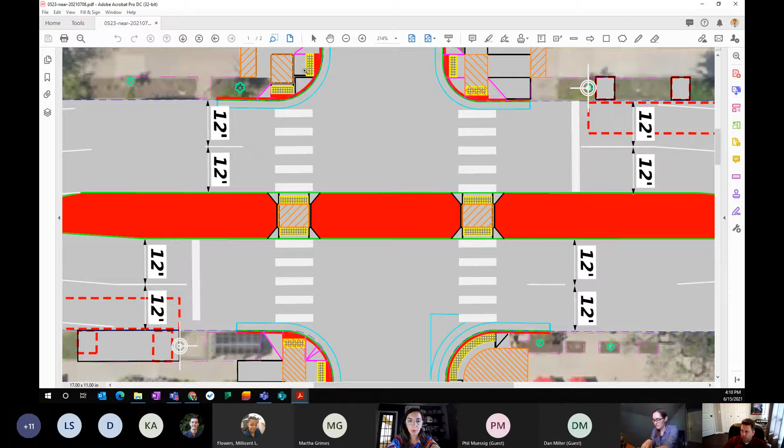I'll add that it's not shown in this graphic, but for most of this median it's a vertical face curb, but in the middle we're putting it to be more of a slope. This will allow for fire trucks, if need be, to cross over the median. It's not going to be too obvious—we don't want it to be obvious, so most cars will take that left, but when a fire truck needs to go across, they'll have that possibility. It's not shown in the graphic, but it's a detail in our construction plans.

Is there a rapid flashing beacon at both of these intersections? Yes. There'll be push buttons on each quadrant for people to activate the RRFB with the flashers. And in the median we'll also have flashers, so it's flashing in the median too. So drivers in that inside lane will see a flasher, and there's a total of 6 different flashers at each of these intersections.

Well, super. I don't see any more questions or anybody with raised hands. I really appreciate you bringing this back before us, Jason and Kelly. I think it was a great conversation in March, but I'm appreciative that we can see this happening, and that's good news about the 4 to 3 pilot program. Yeah, when that's getting more kicked off, I'm not the project manager on that one, but they will definitely be coming back to you guys with more engagement on the 4 to 3. That's all I got, thank you very much for having me.

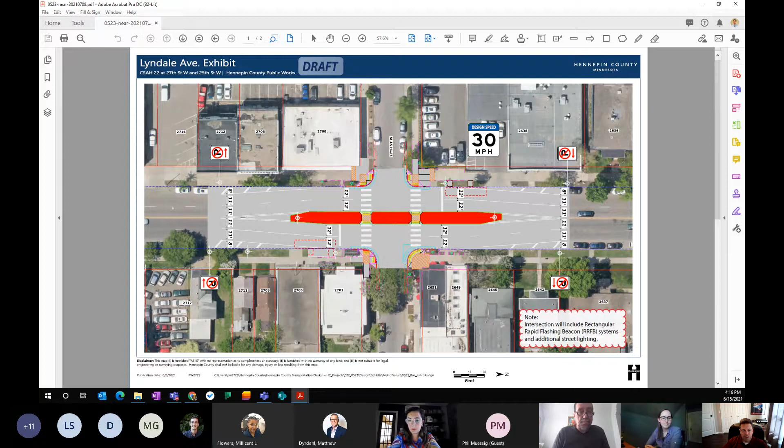Okay. Well, thank you very much, Jason and Kelly. No problem, thank you. Do you need anything from us, by the way? I don't think so. Kelsey, do you need anything?

No, I'd leave it up to the committee. We did get a resolution from you all when we were here last with the previous concept, and I don't think we need one to move forward. If there's something you all would like to memorialize, great, or something about the 4 to 3 support for that coming maybe would be good. But I don't think for this project that we need any further resolutions.

Okay. Great, thank you very much. Thank you, have a good evening.

All right, next up we have the University and 4th Bikeway, which is at 15 to 30%, with Mike Samuelson from Minneapolis Public Works, Kelly Augusto from Hennepin County, and Steve Weiser from Alliant.

Good afternoon everyone, my name is Mike Samuelson. I'm a transportation planner with Public Works, use he/him pronouns, and similar to the presentation Kelsey did, I'm going to largely turn this over to our partners at the county, Kelly Augusto and Steve Weiser from Alliant Engineering. This is a county-led project, and the city's been a partner along with MnDOT and Metro Transit. I'm sure Steve will provide some more detail as well. I think we last came to the BAC in August, so there's been quite a bit of discussion since then, and we're providing an update today to the committee. So Kelly, Steve, I'll pass it over to you.

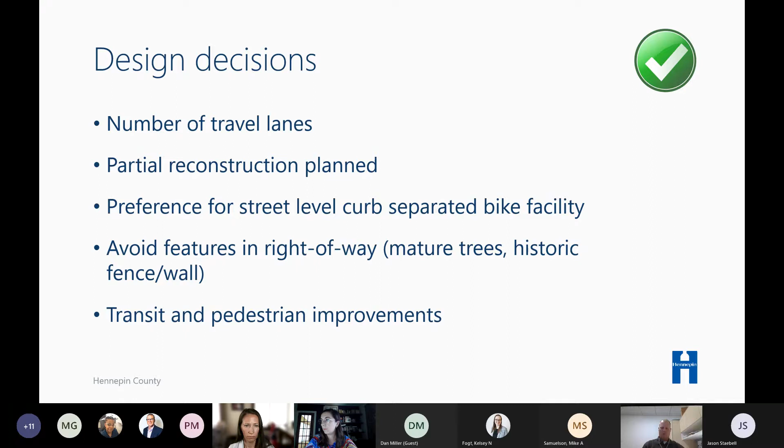Through our first round of engagement and extensive coordination with the project management team, we've landed on a preference for a street level curb-protected bikeway design, which I believe was the preference of this committee as well. There are other constraints and amenities within the right-of-way to consider, including mature large oak trees and historic elements along the University of Minnesota campus.

So working with the project partners, we developed 2 layouts that you have copies of. The first layout, labeled Layout A, has a 2-way curb separated bike facility on University between 10th Avenue and Oak Street. The intent is to provide a buffered bike lane on 4th Street as well.

However, some stakeholders have stressed that 4th Street may be a slightly lesser priority than University, and that a more minimalistic approach on 4th may be understandable to work within the budget provided by the county, while providing a better bikeway on University Avenue. So Layout A has more effort spent on University than on 4th Street.

But we're trying to maintain existing curb lines and sidewalks wherever possible, and where infrastructure is in good condition, we'll try to maintain it in place. With the partial reconstruction, some boulevard space can still be maintained, but opportunity areas for additional greening, boulevard space, and above-ground stormwater management will be limited with a wider bike facility on University Avenue.

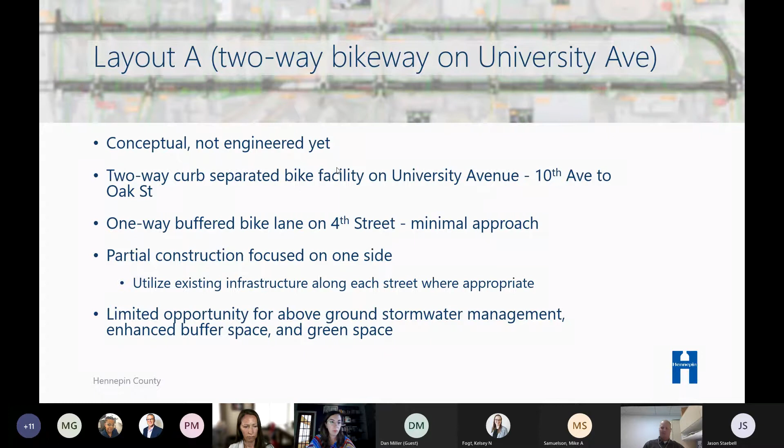This slide shows a representative block for the new 2-way bikeway on University. The segment has 3 travel lanes, slightly narrower than the in-place travel lanes at 10.5 feet, and then 12 feet on the outside where transit vehicles will operate. This design does move the curb line out several feet from where it is today to provide the wider bike facility.

This comes at the expense of boulevard space in some locations and will also require relocating streetlight standards. The design would look similar to the existing facility on Oak Street, south of Washington Avenue on campus, as shown here on the left side of the drawing.

The view at the right shows the dimensions being considered and highlights one of the areas constrained by features within the right-of-way. The green circles represent mature oak trees, some over 3 feet in diameter, right behind the existing sidewalk that we're trying to maintain with either design you'll see tonight.

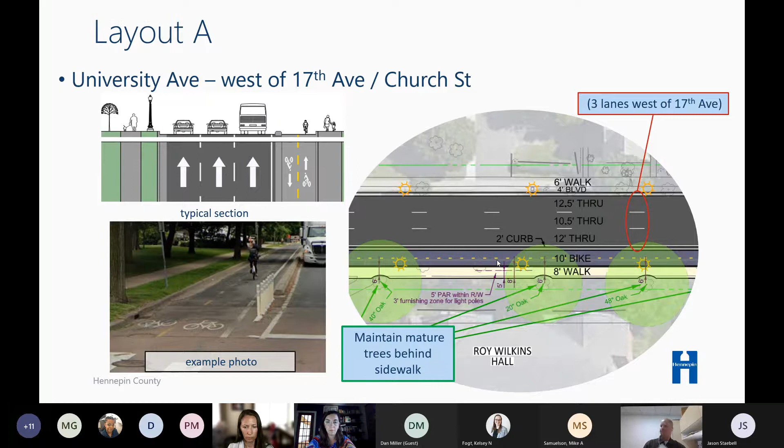The design on the west end includes a 2-way bike facility in areas where the outside curb line is being reconstructed. East of 17th Avenue and Church Street, we have the ability to reduce down to 2 travel lanes and still maintain mobility through the area. This essentially frees up additional space for the bikeway.

I do want to point out that the existing condition out there, which you'll see in the lower left photo, has the existing bike lane in a wide gutter pan area. Basically, it's an integral construction with the curb and gutter, but it's a 6-foot wide bikeable surface that's actually a wide gutter pan for drainage purposes.

But to avoid reconstruction of infrastructure that's in good condition in this area, and to avoid impacts to the historic fencing you'll see on the right side of this drawing, we're proposing to leave some of the curb and biking surface in place. This allows us to leave the sidewalk, the boulevard, and the light poles in place, leaving the green space and boulevard intact while still providing a two-way bikeway in this area.

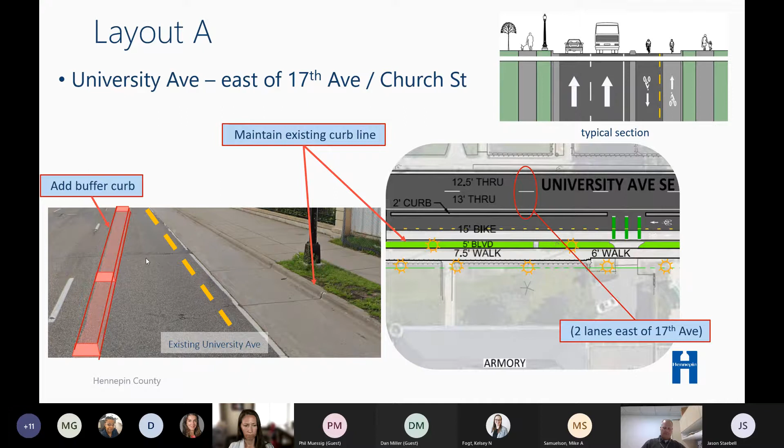With this 2-foot buffer curb that we would add here, we'd still be able to maintain basically a 15-foot wide area from curb to curb face. That would allow us to add a two-way bike facility in that area while still leaving the remaining infrastructure in place. The alternative could be to provide a wider buffer here, with less bikeway space but more of a gap between bikes and travel vehicles in the travel lanes.

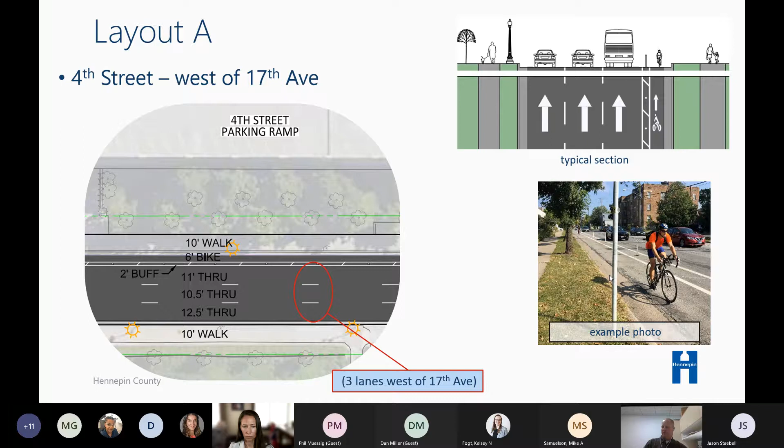There would also be a 4-foot wide biking surface, and then the outer 2 feet would be the existing gutter pan along 4th Street.

East of 17th Avenue, 4th Street would have 2 through lanes. There's been a request from the university to provide space for charter bus parking to be used during events. This space has also been discussed for potential metered general purpose parking at all the other times it's not used for event parking. So that would be the use of this 9.5-foot wide area with a 3-foot buffer and a 6-foot bikeway.

In this area, we'd again propose to leave the curb and gutter in place, the sidewalk in place, and the existing light poles and trees in that area would also remain. We'd provide a 3-foot wide buffer that would likely be striped with delineator posts to facilitate easy unloading for the parked vehicles.

With layout A, the proposed traffic signal phasing along University Avenue with a 2-way bikeway would mimic the phasing implemented on the recently constructed Jackson Street bikeway in St. Paul. A leading bike-ped signal interval would be provided, and right turns would be restricted on red to minimize conflicts with right turners from the University cross streets looking to their left for oncoming traffic and pulling out in front of bicyclists traveling in the contraflow direction.

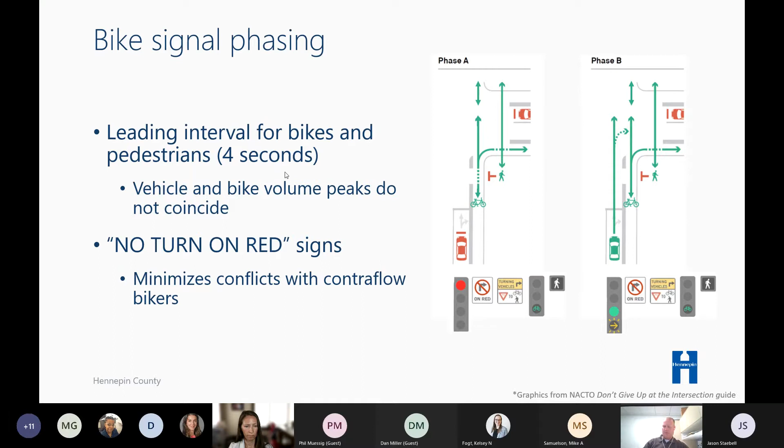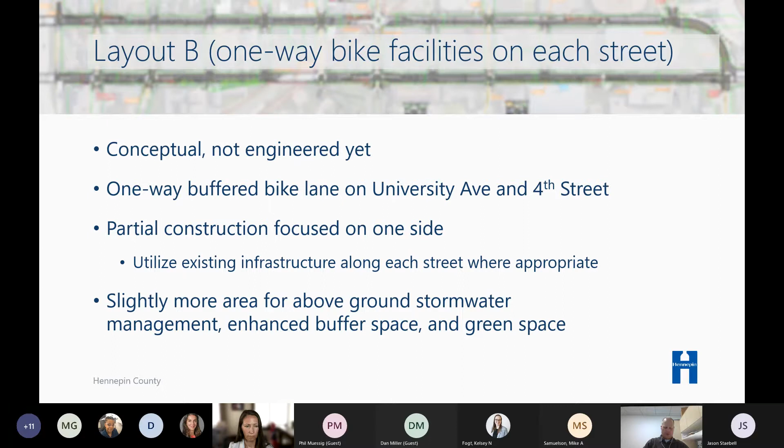The second layout we're working on, labeled option B, has one-way separated bike facilities along both streets. Again, construction would be focused on the bikeway side of the road, with the majority of infrastructure remaining in place. As with layout A, the intent would be to maintain much of the in-place curb and gutter, sidewalk, lighting, and boulevard spaces as much as we can. With this option, there may be additional opportunities for green space and green stormwater infrastructure along University.

This slide shows a representative block for a one-way facility on University on the west end of the project. Again, we have 3 travel lanes, as you'll see on this typical section. We're maintaining the existing 6-foot wide concrete bikeway surface that's out there today, and adding a 2-foot wide raised curb to separate vehicles from bikes. Maintaining the outside curb allows us to save the lighting and sidewalk in this area and maintain existing boulevard trees in addition to the mature trees already mentioned behind the sidewalk area.

In this scenario, striping and delineator posts could be considered in lieu of the curb to make it feel more open for bikers, but that would come at the expense of the better protection afforded by a raised curb, with more potential for handlebar impacts with the delineator posts. So we've shown a raised curb element in this scenario.

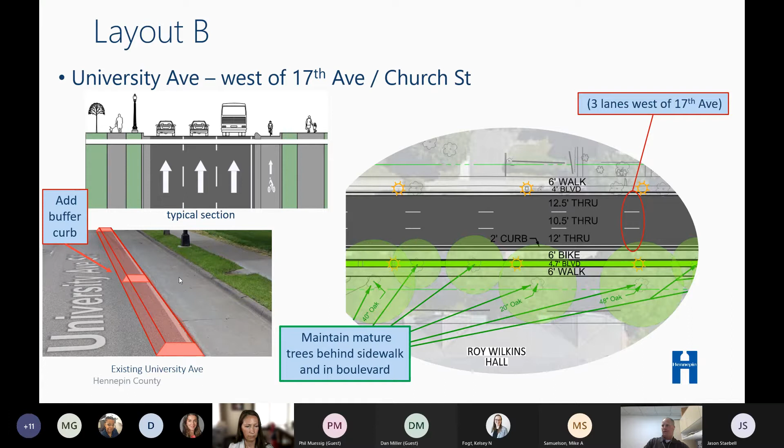The approach east of 17th Avenue, Church Street, is different for layout B. In this area, we're proposing to move the outside curb inwards towards the center line of the street to provide an 8-foot wide one-way bike facility.

The 8-foot width would be an improvement for side-by-side riding and passing, providing a more comfortable ride for bikers than the 6-foot wide alternative used in some of the other areas. Moving the curb allows for a wider boulevard and green space, and potential green stormwater infrastructure if the other criteria for that implementation are met in this area.

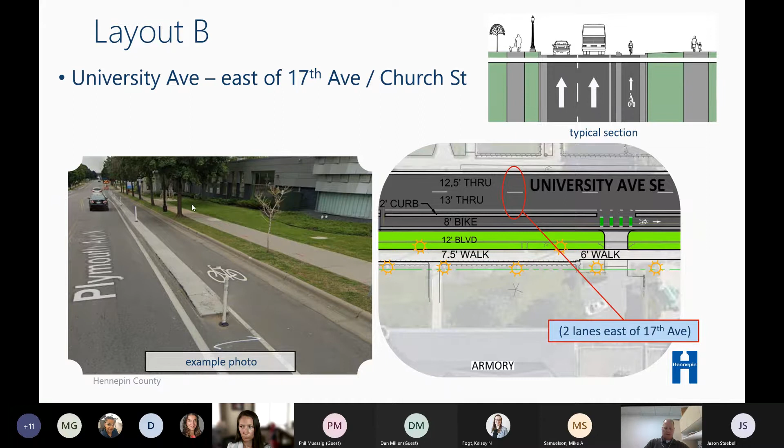Here again, we'd have a 3-foot wide buffer, which would include a 2-foot raised curb element, and the outside sidewalk and light poles could remain in this scenario.

Moving up to 4th Street, this is very similar to layout A in terms of space. Lanes will be narrowed from the existing condition to provide for a 2-foot wide buffer, with the one-way option on University being less expensive to build than layout A.

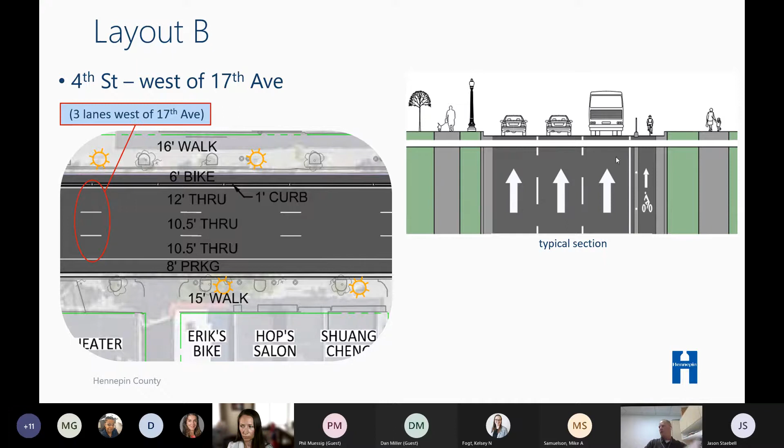There may be some budget available to provide for a curb separated bikeway along 4th Street from end to end. The buffer curb would have to be narrow if we maintain the outside curbs. It'd be 1 foot wide, and the bike lane would still be 6 feet face to face of curb, same as option A, but there'd be a raised curb element as you see on the typical section on the right.

Layout B is identical to layout A east of 17th Avenue. Again, there's 2 through lanes, bus, and potential general purpose parking in that area. Striping and delineator buffers would allow for easy loading into the parking areas, and we've maintained the outside curb and gutter, sidewalk, and the light poles infrastructure, which is in good shape out in this area.

So with both options, there's a lot of detail to work through yet with curb types, curb shape. Some of the options might have different curb shapes to make it easier for pedestrians and riding close to those curb types. So a lot of work to be done there, as well as determining the specific intersection type treatments. Once the feedback's received from the public, we'll work with the project partners to select the preferred alternative and advance the final design elements.

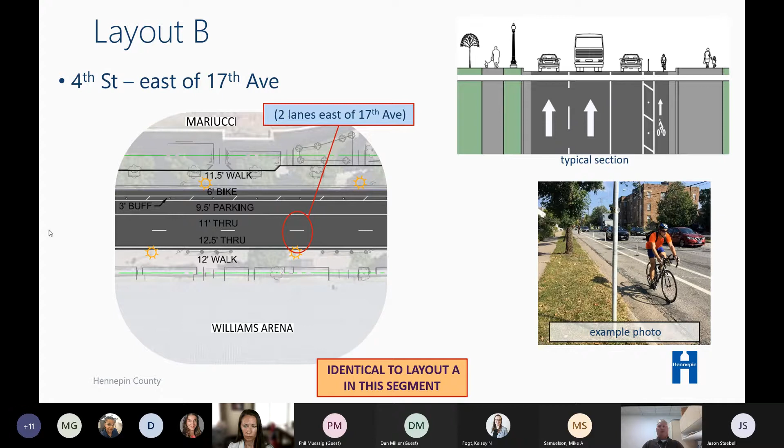And with that, I'll turn it back over to Kelsey to talk about kind of our next steps with the process.

Sure. Our next steps are that we're currently working with the project management team to prepare information for an online public open house that's going to go live starting next Monday, June 21st, and be open through July 2nd.

We're also kicking off our second round of outreach with project stakeholders, including neighborhood associations, business, and university groups. After that, and after the engagement activities, we hope to arrive at a preferred layout with our project partners to go for municipal consent on a layout, possibly in August of this year.

Then the final design and environmental documentation efforts need to be completed and approved by June of 2022, so that we can align with the requirements of our federal funds that are part of our project budget. And then construction would begin in spring of 2023.

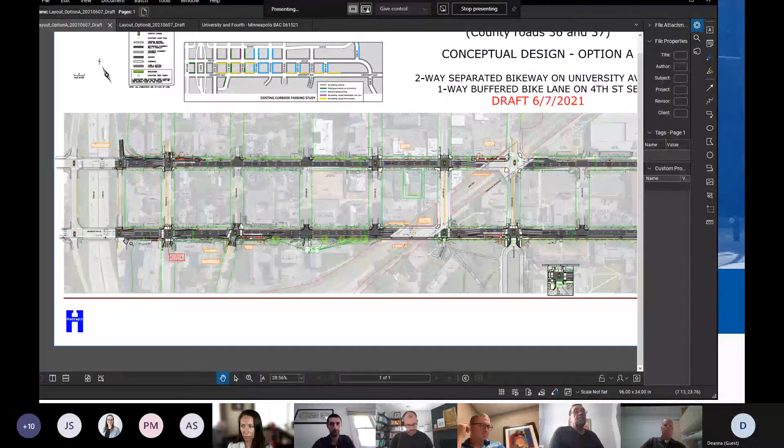Sure, I think I can here. Let me try to grab the screen. Which one would you like to start with? Let's start with A. Okay, I'll pull up A. Can you all see that? Hopefully—there you go, is that in? Is that up? Yep, that's great. Okay, tell me if you want me to go slower or faster, however you want to deal with it.

One thing I want to point out that we recently learned is that MnDOT is potentially considering reconstructing the bridges over 35W in the 2027-2028 timeframe. These would potentially be reconstructed, and the improvements would probably stretch over to 10th Avenue. So we'll be looking at these blocks a little differently, but I wanted to point that out to the group.

Moving on, there's one-way bike facilities coming in from the west that we would pick up. There's the new two-way facility along 10th that will finish construction soon. On the south leg we've shown a two-way bikeway on 10th Ave. With option A, we'd pick up a two-way facility. We've got constraints in the right-of-way by the Knoll apartments—there's an accessible ramp that juts out into the right-of-way, so there's a bit of a pinch point, which is why the layout juts out in this area.

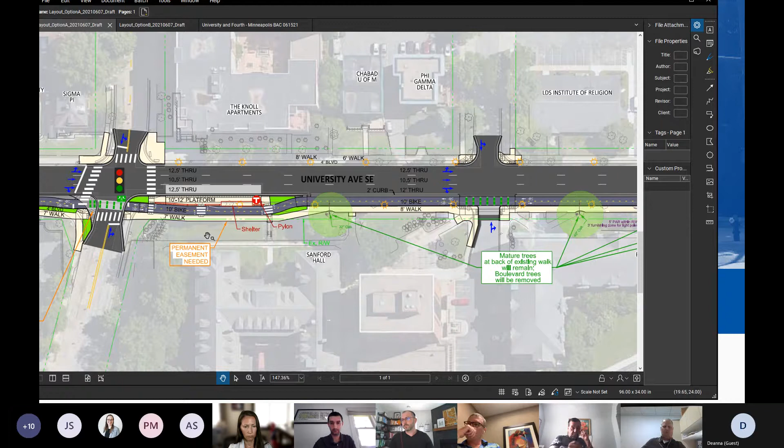Transit platforms along the corridor have been consolidated from what's out there today. The university has worked with Metro Transit to identify 3 locations along each corridor for transit platforms, which will also service the future E-line BRT. For the platform areas, Metro Transit would like 6 feet out front of the shelters for accessibility and loading, and behind here we'll need to look at the grading to match into the adjacent university property.

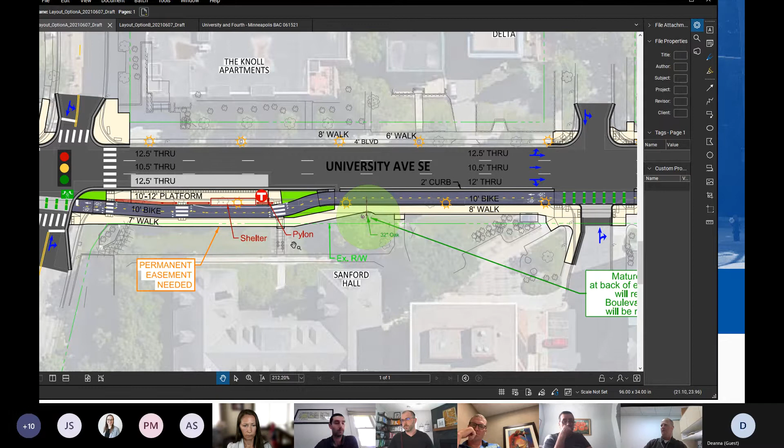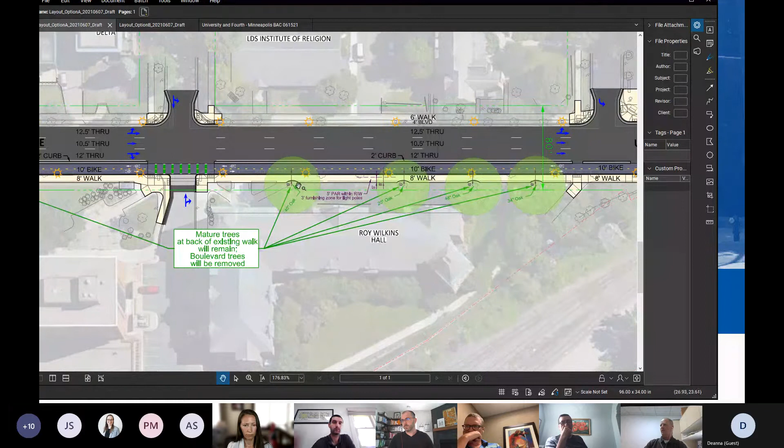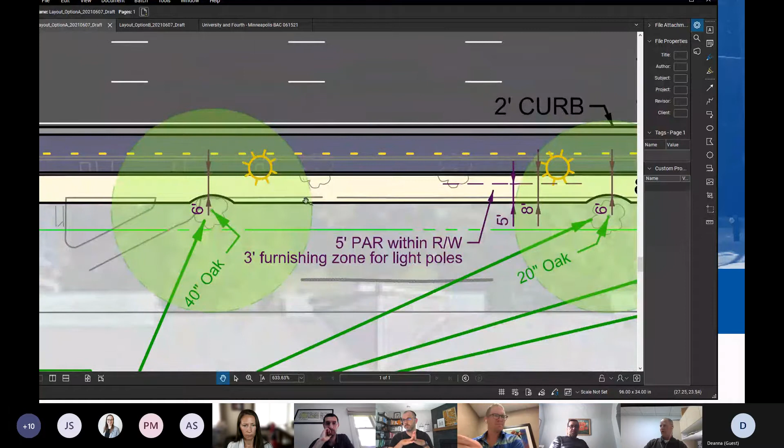This area here is where we end up—by Roy Wilkins Hall and Sanford Hall, there are some very large oak trees that have been there for many years, a couple of them 3 feet in diameter or more. They're good amenities for the university and historic elements in this area, so we're trying to avoid those. They're inside the right-of-way between the right-of-way line and the sidewalk, so we'd like to avoid them, maybe relocating the light poles currently in the boulevard area in this scenario. As you can see, we're moving that curb line back, relocating those light poles so maintenance equipment can still get through to plow sidewalks without impacting these large oak trees.

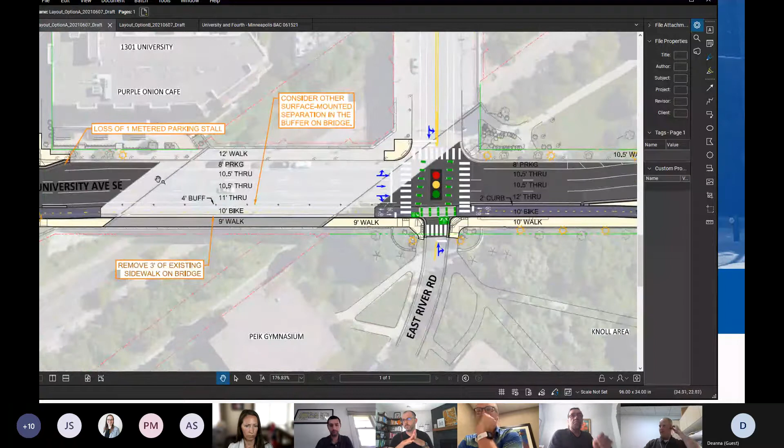The bridge between 13th and 14th, in this area, we've heard that parking is pretty valuable for the businesses in Dinkytown. With this option, we're maintaining the parking and showing an actual narrowing of the sidewalk, which would require we hammer some of that sidewalk off the existing bridge to provide the 10-foot bikeway. Still a generous buffer from travel lanes, but basically reducing the sidewalk space to provide that 10-foot bikeway.

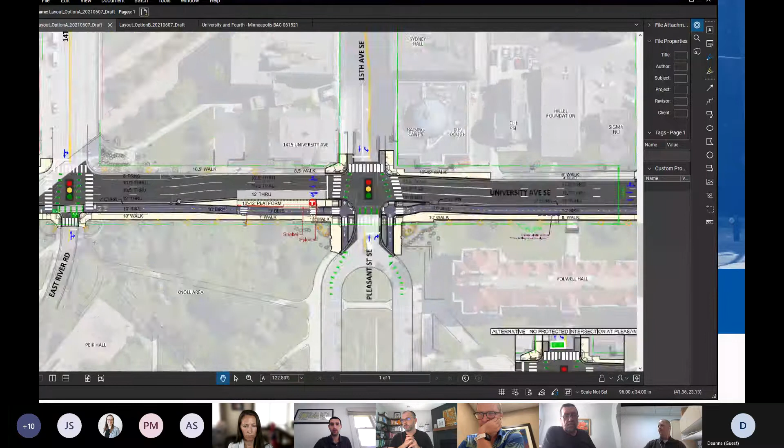Moving east, transit platform at 15th. This one's heavily used. There's this historic wall fencing that extends along a good portion of the university property here along University Ave. It is a historic element, it's been there a long time, and we're trying to avoid impacts to that. The lighting is behind that in this area, so that helps us out in terms of space. But we're trying to provide the transit platform, bring the bikes back behind the transit platform, and still have a reasonable space for sidewalk.

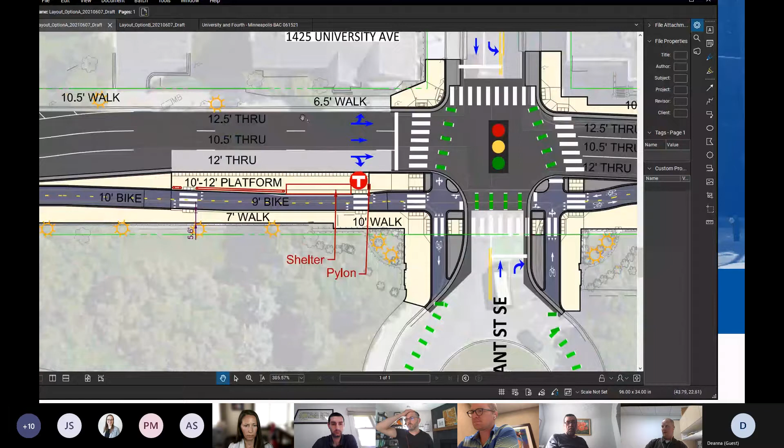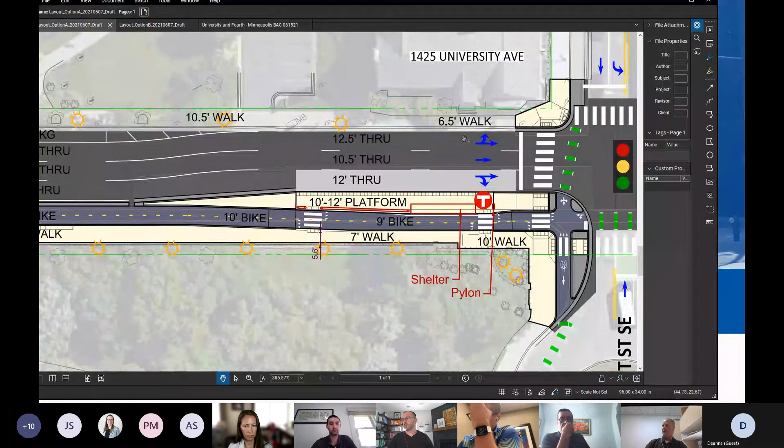We do have the ability here on the left side of the street. There's a wider travel lane right now. There's no parking that ends before this driveway, but there's a wider parking slash drive lane over on the left side that we're able to push into to provide more space here for the transit platform.

And then in this area along University with the two-way bikeway, we do lose the boulevard between, again, the historic fencing wall area, to push into that for providing the bikeway. We do lose that green space.

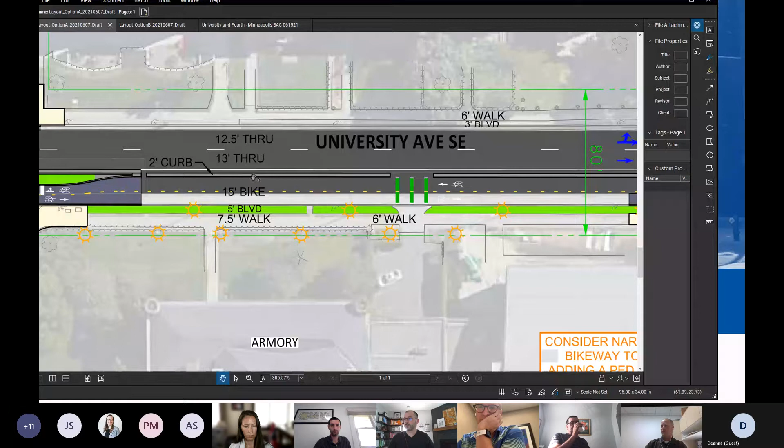Once we get beyond Church Street, 17th Ave, we reduce down to 2 travel lanes. In this area, we can still maintain that boulevard, maintain that outside curb area, and this is where we have the ability to provide that wider bike facility. I believe I mentioned in the presentation area, we could provide a wider buffer curb or some other wider element to separate the bikes from the travel lanes. But with this layout, we're showing just a wider, more generous bike facility.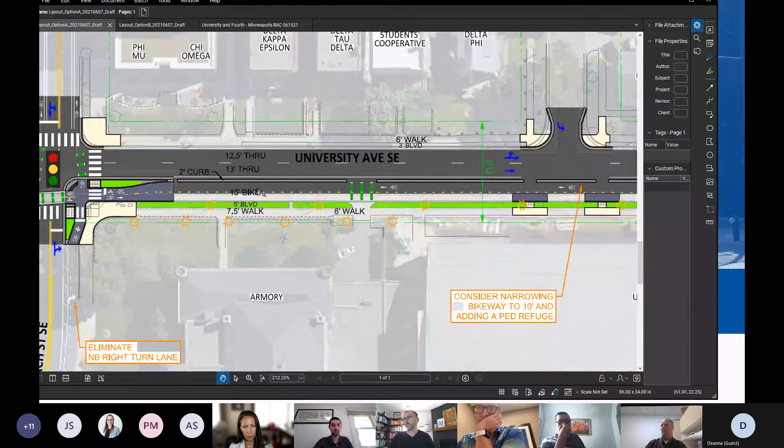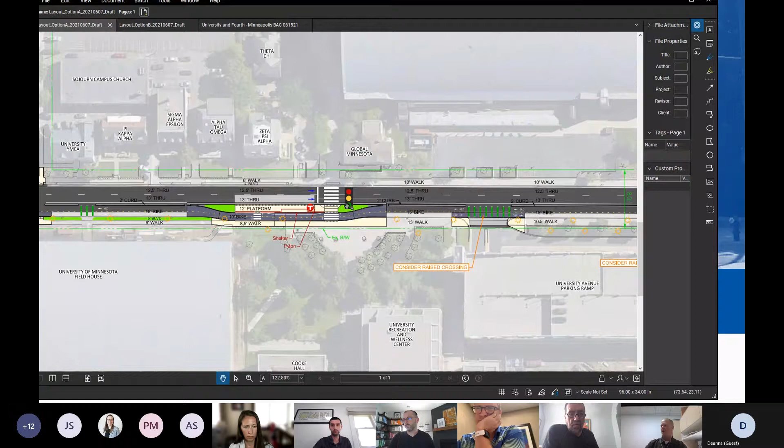So the eastbound would travel on that existing outside wide concrete surface, and then the westbound would be traveling on the bituminous surface. At 18th here, another transit platform right by the pedestrian crossing. So a wider area here will be bringing the bikes back behind.

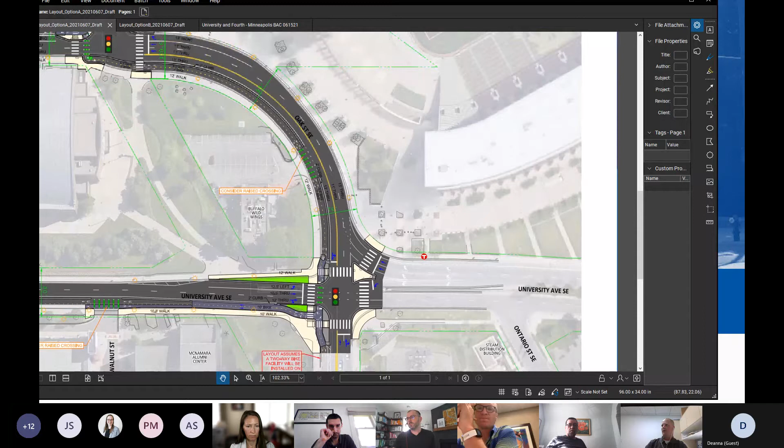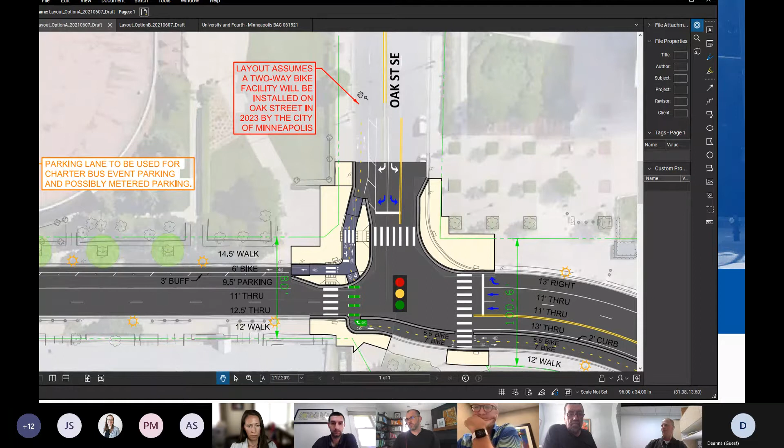And then at Oak Street, the city has plans for a two-way facility or enhanced bikeways on Oak Street in the future. We're assuming that would be a two-way to connect up with what's south of Washington, where there's a two-way bike facility on the west side of Oak Street. And then we carry that two-way bike facility up to 4th Street, and at this point are assuming that two-way facility would continue on the west side of Oak Street, north of 4th Street.

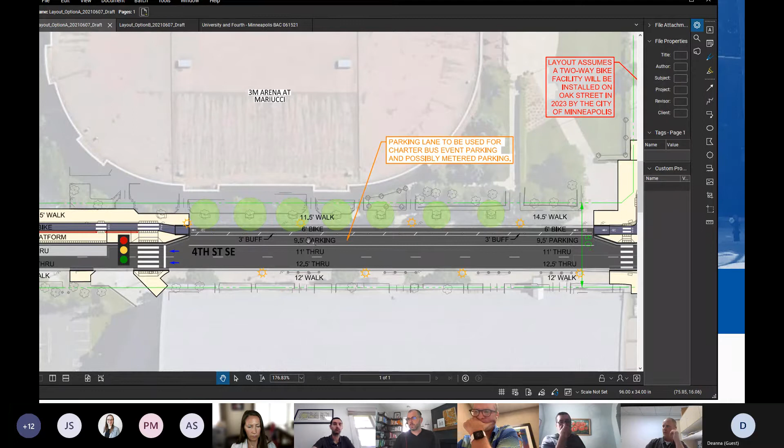So we cross the bikeway over here, and then on 4th Street in this area, this is where the charter bus parking used during events would be. The 9.5 feet is basically just what's left over to provide a 3-foot buffer for door swings to the 6-foot bikeway. You could play around with these dimensions and mix that up as well. But this area would then be considered for general purpose parking when it's not used for events.

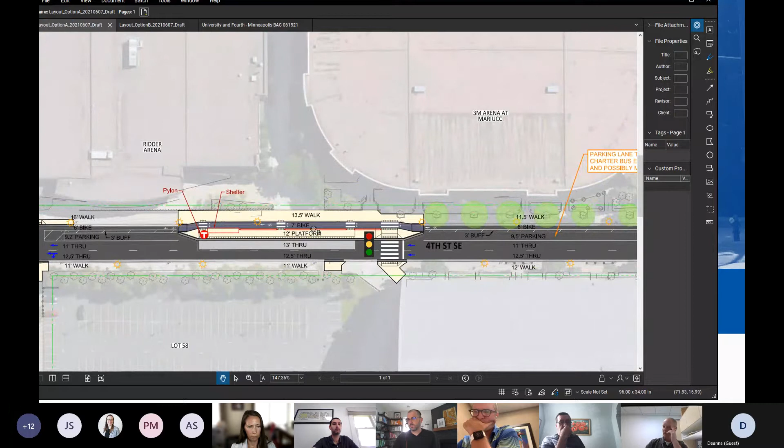Large transit platform here at Ridder Arena. A lot of express buses drop off here, so this is one of the longer platforms on the project. And then again, the bikes would go back up behind the transit platform and then back down to street level beyond the platform.

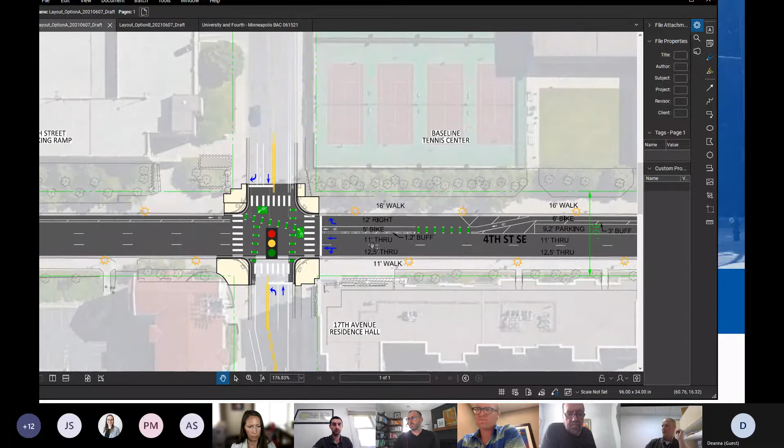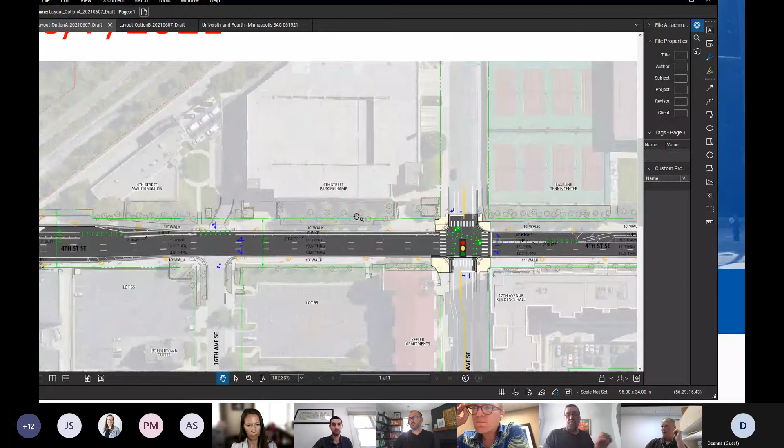And then continuing on, same scenario here, where we've got 2 travel lanes up to 17th, a right turn lane to provide access over to this area where they've got a large parking ramp structure. And then 3 lanes to the west, continuing to 15th.

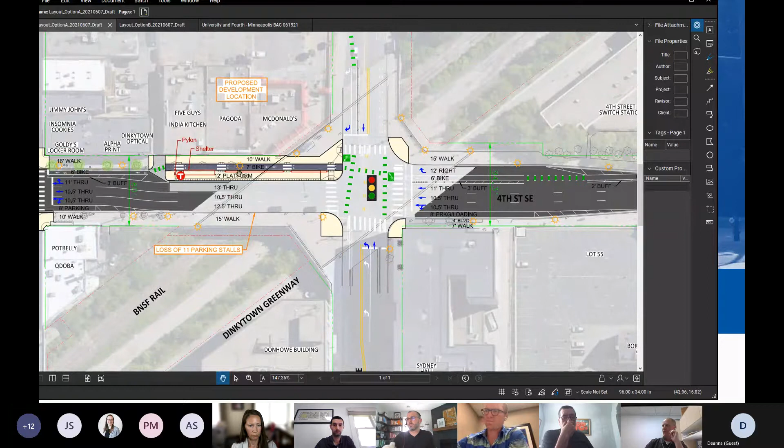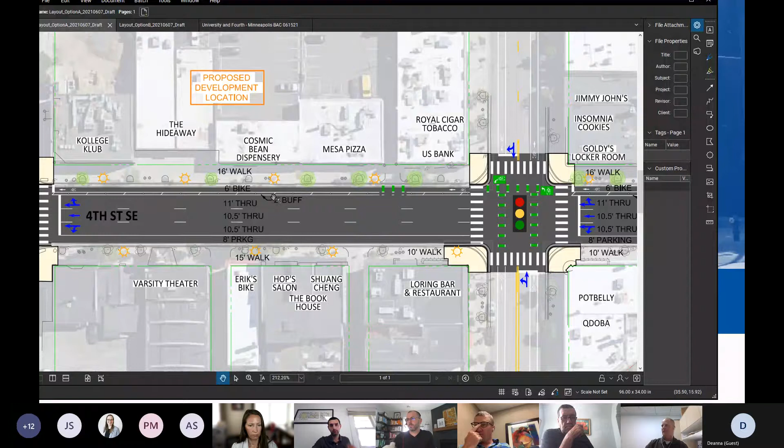We do have the ability here to eliminate this left turn lane and add some parking over on the east side of 15th. Continuing on, this just maintains the existing outside curb lines, leaving a 2-foot buffer, shown here just as stripes and sticks. Currently there's a little buffer striped out there, but we've narrowed up the through lanes to provide a bit extra buffer space with this alternative.

That takes us up to 10th and the area by the 35W ramp, where we eliminate that free right turn and bring the bike facility and pedestrian facility up to that new intersection. We're working through some details with MnDOT, and we'll have to work through interim details until they build the bridge project and construct this block to its permanent configuration. There might be some ability to use existing infrastructure to bridge the gap for the next couple of years.

So I'll jump over to layout B, and then we can go back for questions.

With layout B, this has one-way facilities along both streets. Again we've got an 8-foot bikeway here coming off the ramp to get us to the new facility, and we're able to provide a little more width here. This side of the street has a bit wider pavement out there, and we're proposing to fix that situation. There's a weird taper here that we can get rid of and reconstruct.

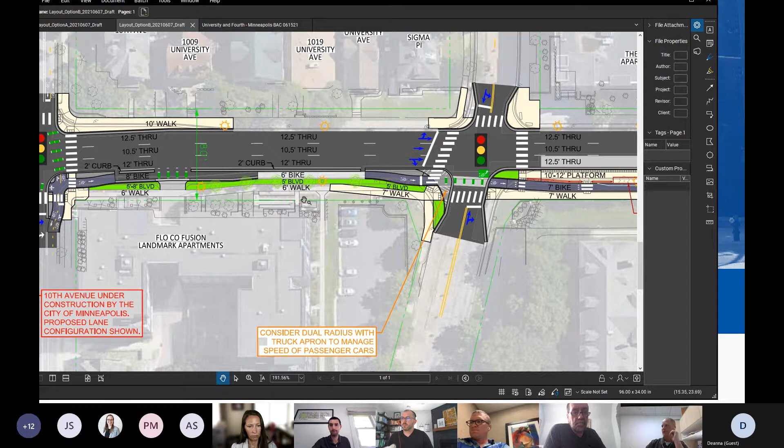Again, the pinch point by Flo Co Fusion Apartments — in this area we propose to shrink the bike lane down to 6 feet through that stretch, to save their infrastructure, save their trees, save the boulevard space that's there today, and their accessible path up to their building. With this option, with a narrower bikeway at 11th, we're able to keep the improvements within the right-of-way without getting permanent easement from the university, which could be problematic for the project given the way the land was acquired and the way the university owns their land.

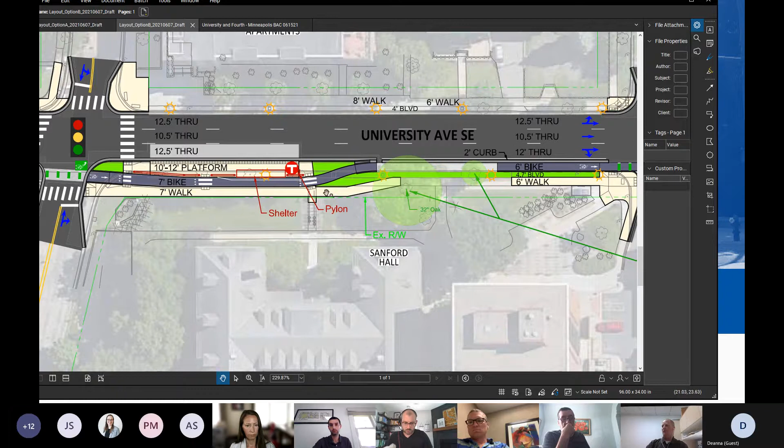Easements could be difficult, so this option keeps the improvements within the right-of-way. With this one-way bike facility, again 6 feet wide, which we've acknowledged is narrow, we can keep the boulevard trees in place, some of which are fairly large, as well as those large oak trees behind the sidewalk. All the existing infrastructure in good condition — the sidewalk, the light poles — would remain with this option. We'd just tack on that 2-foot buffer curb right next to the existing 6-foot concrete gutter pan.

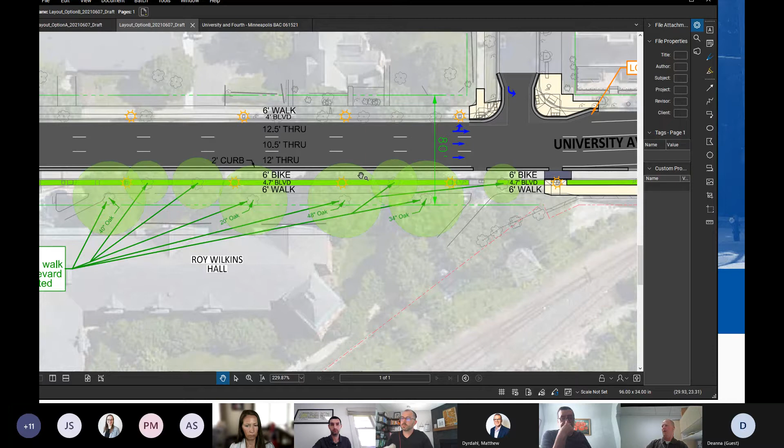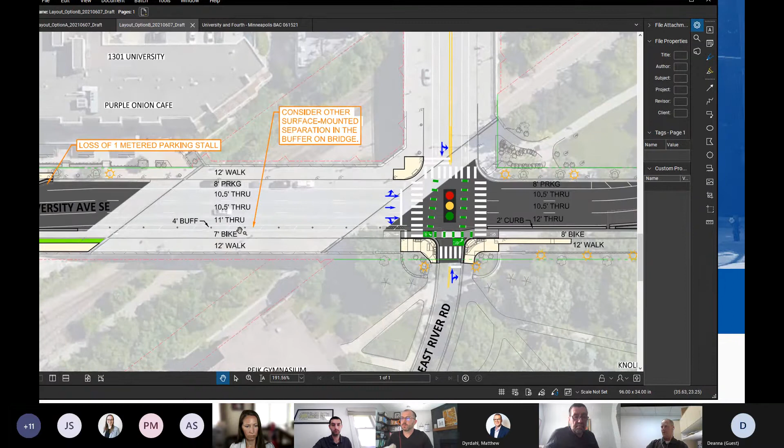With this option we don't have to get into reconstruction at the bridge. We'd be able to maintain a wider sidewalk, a 7-foot bikeway, still a 4-foot buffer, and the parking along the north side of the road. This area is pretty similar, but has a bit more generous sidewalk area with this design given the narrower bikeway.

We're working through intersection details with the university as well. This one shows protected intersection corners — something we're considering, but we still have a lot of detail to work through with the project partners. The boulevard space here in front of Folwell Hall would remain with this option, and the green space you see here we can maintain.

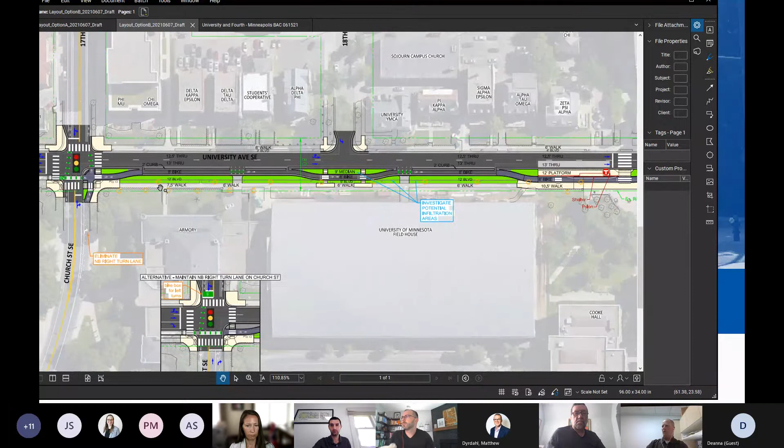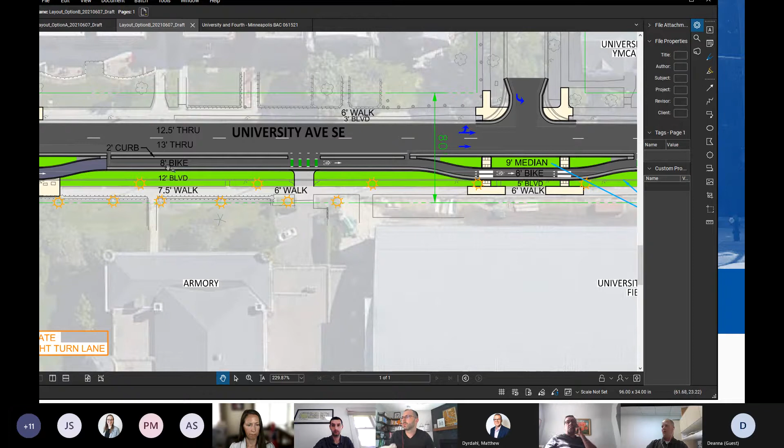As you go east of Church Street, this is the area where the curb line moves out — this is the secondary roadway curb. You've got your buffer curb out here, then the secondary roadway curb, and this is the existing curb line, if you can see where my cursor is. So this curb would move out, giving us a more generous boulevard space available for either green infrastructure or just grass boulevard.

But more green space with this alternative. We show a median in this option, so the bike lane pulls back behind, and the pedestrian crossing comes up here to shorten it up, so peds only cross 2 lanes of traffic and can have this refuge median area here. We showed it as green space — obviously a lot of details to work out, but we showed it as a potential green space area.

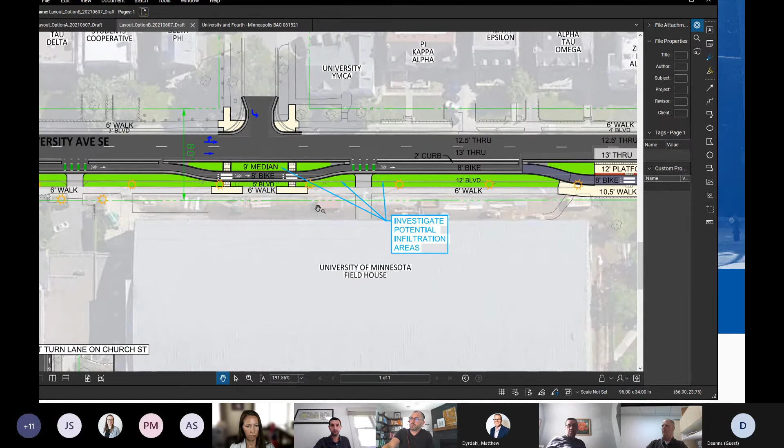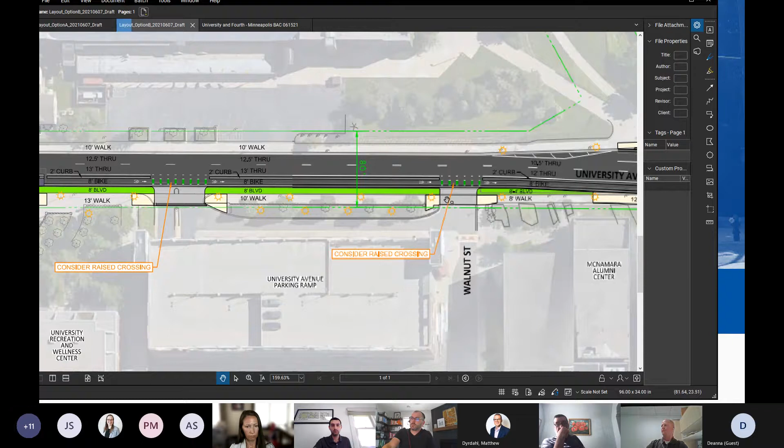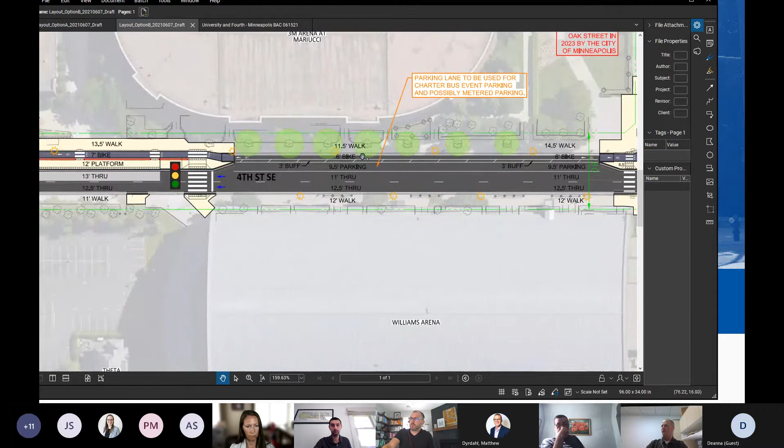The platform area by 18th is similar with both options, just with a little more sidewalk area given the narrower bike facility. This area is similar with both options as well — a two-way bike facility up Oak. This area is identical to layout A, where we've got the charter bus parking and the general purpose parking.

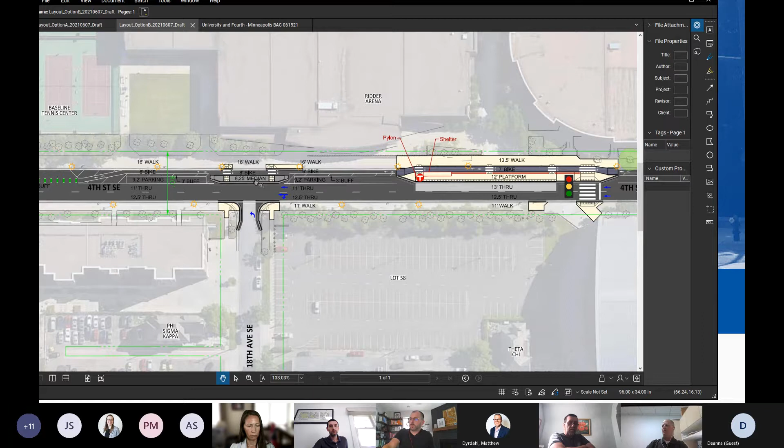With layout B we showed another refuge median here where the bikes go behind and the peds could sneak out. Again, a little less money spent on University, maybe a little more available for use on 4th Street for some of these enhancements.

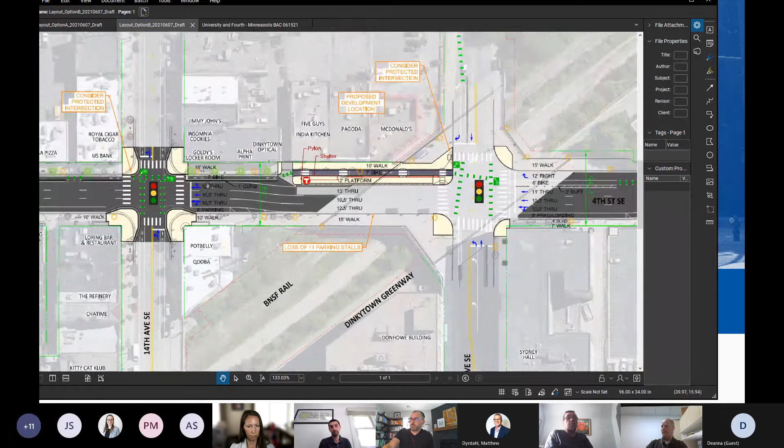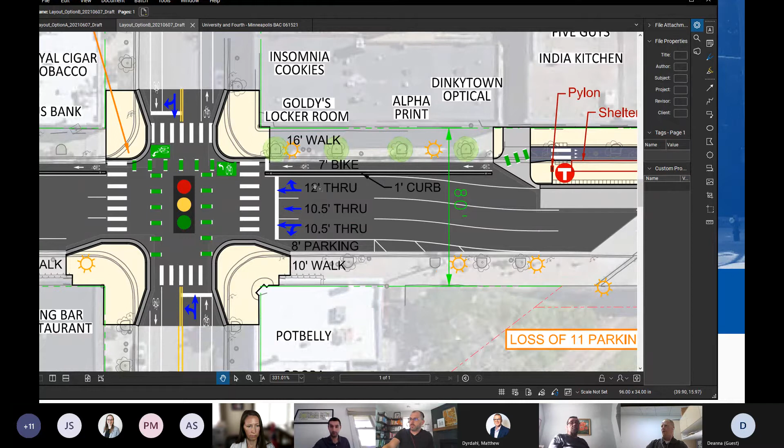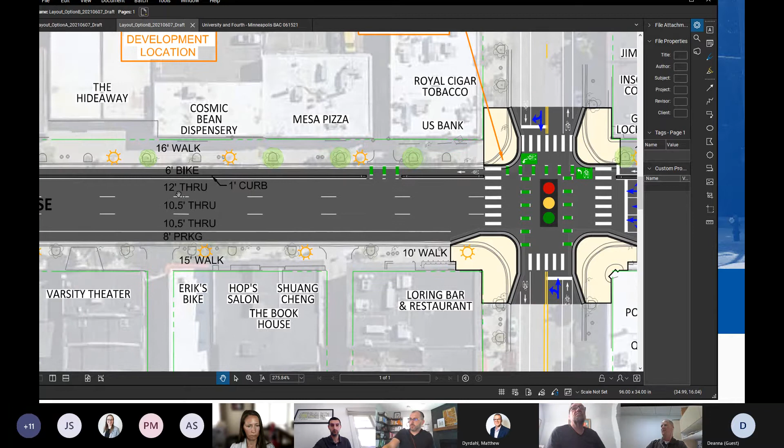Similar work through this area between the two layouts, and then when we get to the Dinkytown area, layout B shows curb, basically a 1 foot wide barrier curb to separate the vehicles from the bikes. We need to work out the details of what that curb looks like, but you could potentially put in more of a tapered style adjacent to the bike lane, and more of a barrier style adjacent to the vehicles.

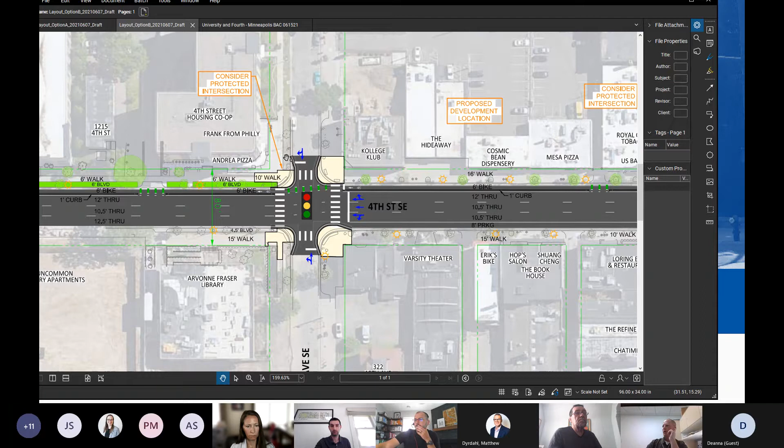This is to kind of delineate the space and avoid pedal strikes on the bikeway side. With this option, layout B, we show some more enhancements along 4th, more curb extensions, a little more extensive work, since we're spending less on University to provide more reconstruction there, maybe a little more left in the project budget to do a little more on 4th Street. Curb extensions again here to shorten the crossing distance on some of the unsignalized intersections, and similar improvements on this end.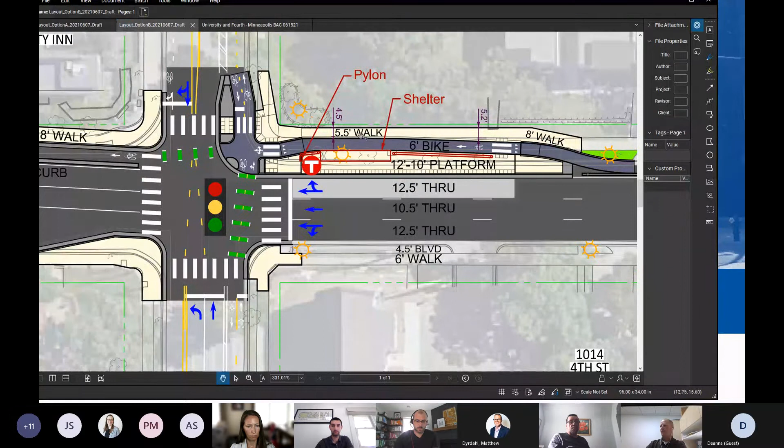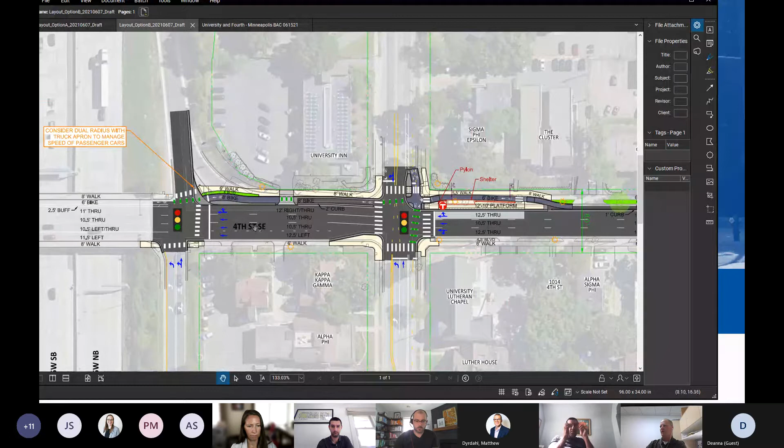The transit platform here at 4th, we would hope to try to get this work inside the right of way, very tight. Not an ideal sidewalk width behind to provide a 6 foot bikeway, but very tight for space in this area. And then again, getting rid of the free right condition, trying to improve this intersection at the ramps, which is one of the biggest problem areas on the project that we've heard.

So that's kind of a walkthrough. Hopefully I didn't bore the heck out of you, but any questions, or do you want me to back up or go to any specific areas?

Maybe this is a question for Dan. Dan, how do you want to handle motions on this? Should we get one out early just to get ourselves on a path?

I guess I'd like to ask first what the timing is and the urgency for a motion from Kelly, and from Kelly and Michael, I guess.

Sure, thanks, Dan. I guess we'd ideally like a resolution from your committee again with support for one option or the other that's being presented, similarly to the resolution that you provided the last time. And the timing as to when you would need that?

Maybe by the time you meet again in July, would that be reasonable? That's very reasonable. We often do motions right after this meeting or during the meeting, and I think it's helpful since you've presented a lot of information here that is really good, and I think it's worth taking some time to dwell on it if we can. And we have the public open house open until July 2nd.

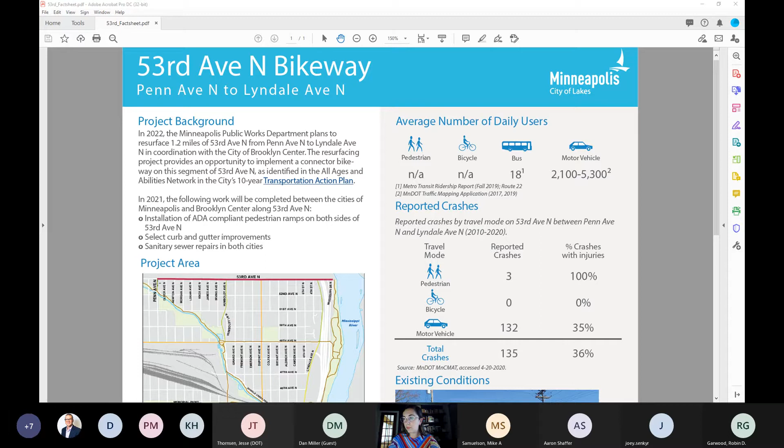So in 2022, Minneapolis Public Works plans to resurface 1.2 miles of 53rd Avenue North, from Penn Avenue North to Lyndale Avenue North. So the resurfacing is taking place between Penn and this, where you see the red line here.

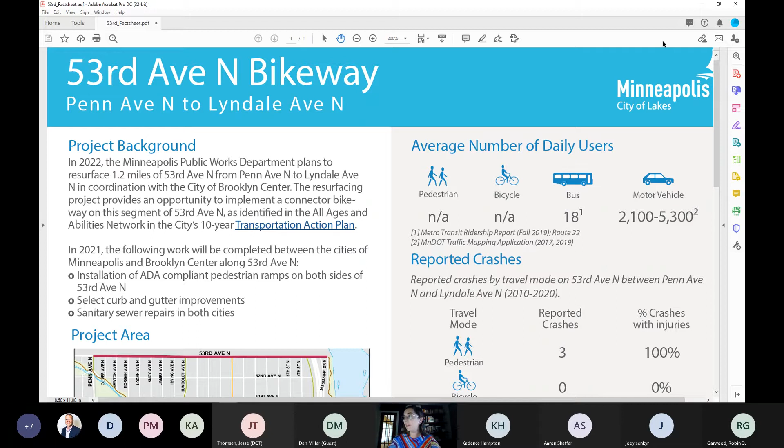However, we are looking at the bikeway that is identified in our city's 10-year transportation action plan, the All Ages and Abilities Network. We do have a connector bikeway facility identified from Penn to the Mississippi North River Regional Trail, which provides an opportunity to implement this bikeway segment as part of that resurfacing. As many of you know, typically our bikeway projects with resurfacing are limited to striping and signing.

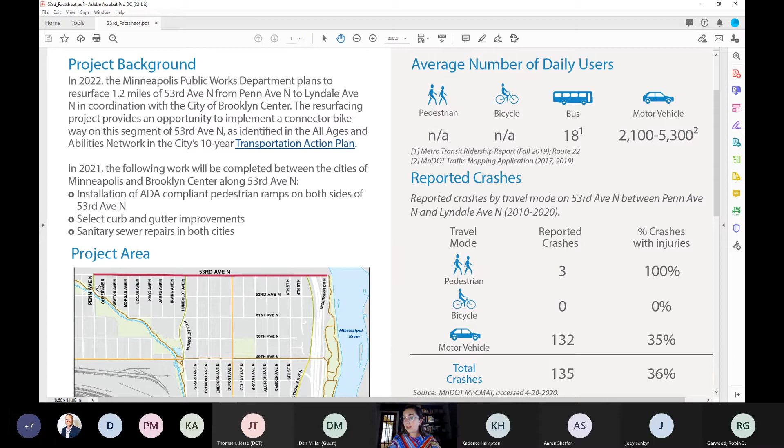So 53rd Avenue North is a border street and shared street between City of Minneapolis and City of Brooklyn Center on the north side. As you can see here, this will connect the northernmost part of the city to our existing low stress bikeways, the Shingle Creek Parkway and the Mississippi North Regional River Trail.

We also have identified in our All Ages and Abilities Network a couple of other north-south running low stress facilities, at Dupont and a couple of connectors that will be coming in the future. So this is really a crucial connector on the north side of the city.

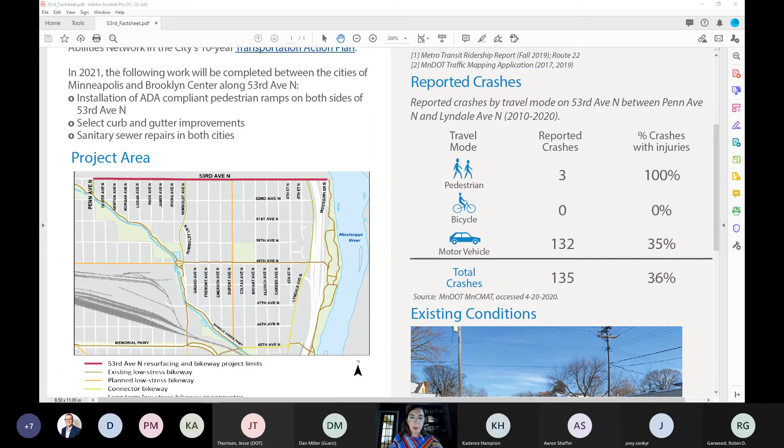So the resurfacing also provides the opportunity to improve traffic safety and mobility for all modes while bringing this corridor in line with city policies and goals around Vision Zero, our Complete Streets policies, and the city's 10-year transportation action plan. In addition, some of the goals of this bikeway project include enhancing comfort and improving predictability for all users, so everyone knows they can expect to see bicyclists on this roadway, supporting existing and future bicycle demand, as I just talked about and outlined here on this map.

Improving bicycle network connectivity and access to destinations. This is a primarily residential area, but it does have a lot of parkways, and a regional park here that people want to connect to with all modes.

And then lastly, reducing vehicle travel speeds. As most of you know, through our Vision Zero efforts, we are lowering speed limits on city streets. Border streets will come later. I know Brooklyn Center is looking at approaching their speed limits collectively.

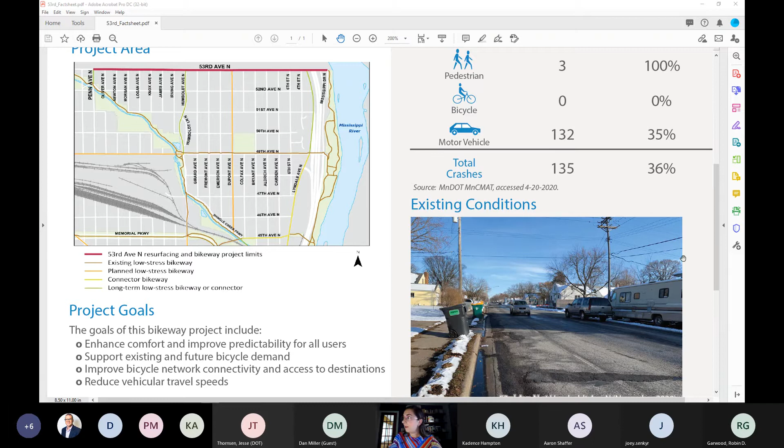So that may not happen as part of this project, but it will happen in the future. I will come back to the timeline and just jump to some of the existing data. So 53rd is a fairly low traffic volume street for all modes. It's low enough for people walking and biking that we don't actually have the counts for that through our historical data. In terms of Route 22, which runs on segments of 53rd Avenue North, there's an average of 18 people boarding that bus route. For motor vehicles, it's anywhere between 2,100 to 5,300, with more traffic as you get closer to the 94.

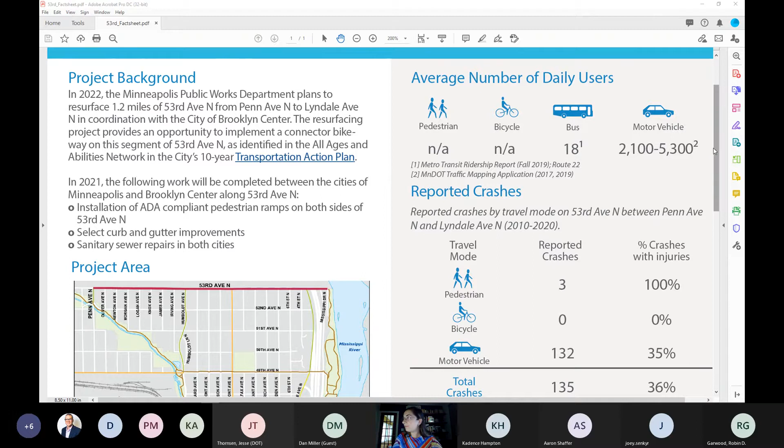In terms of reported crashes, given the volume of the street, there are more crashes than we typically see on similar streets, with 135 total: 3 pedestrian, 0 bicyclists, and 132 motor vehicles, with 100% of the pedestrian ones resulting in a crash with an injury, no fatality. Same with the motor vehicle, 35% resulted in some sort of injury and no fatality. This data is between 2010 and 2020.

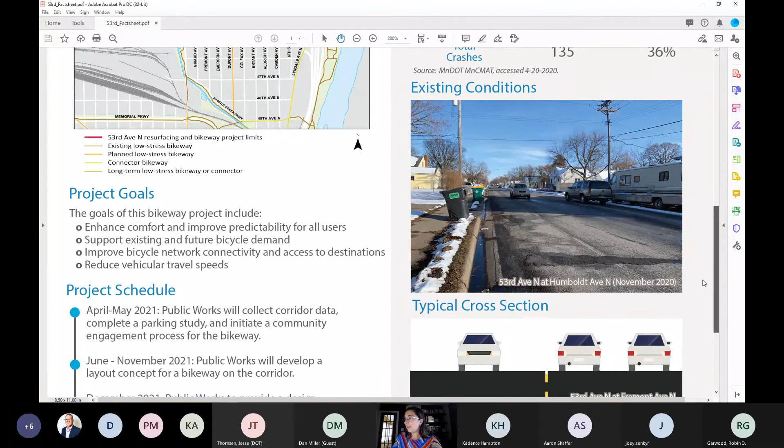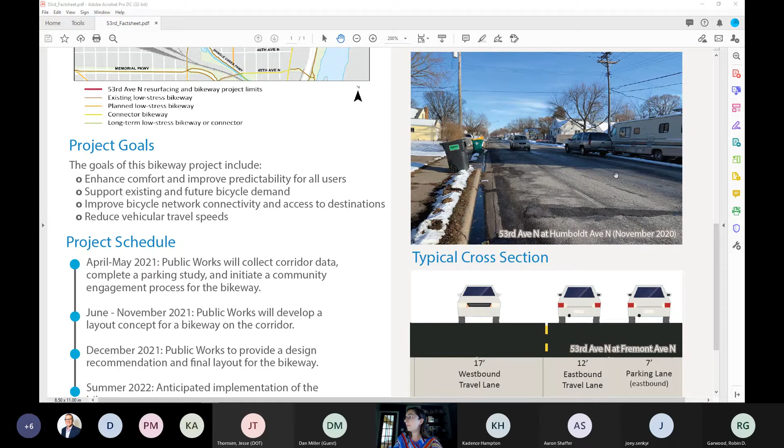In terms of existing conditions, right now there's just directional travel lanes. As I mentioned, it is shared between Brooklyn Center. There is a separated trail closer to I-94 for a couple of blocks. Brooklyn Center does not have any plans to extend that trail, which is why the bikeway is being implemented. The street varies in width anywhere from 36 to 42 feet. There is no parking on the north side and the Brooklyn Center side except for Fremont and Logan, and on the south side there is parking for the most part, except for Humboldt and Knox.

In terms of schedule, right now we are at 0%. We just finished collecting speed data. We're finishing up our parking study and collecting all that data, doing some initial engagement with the neighborhood groups, as well as the BAC tonight. Once we compile that engagement feedback, we'll be looking to develop a concept for a bikeway. So I will come back here in the next couple of months to present that layout to you all.

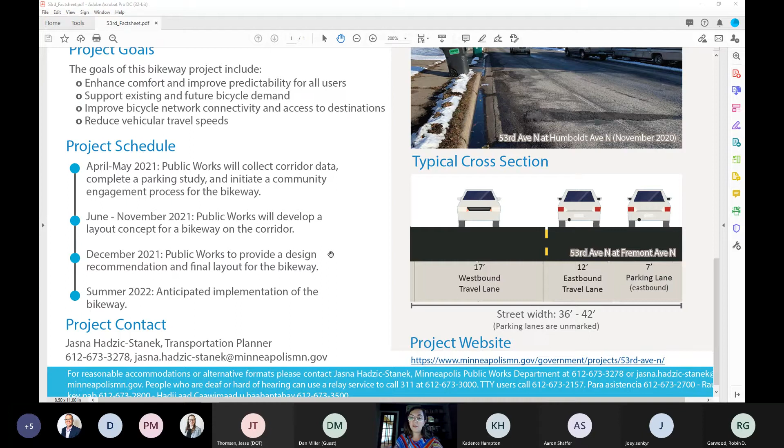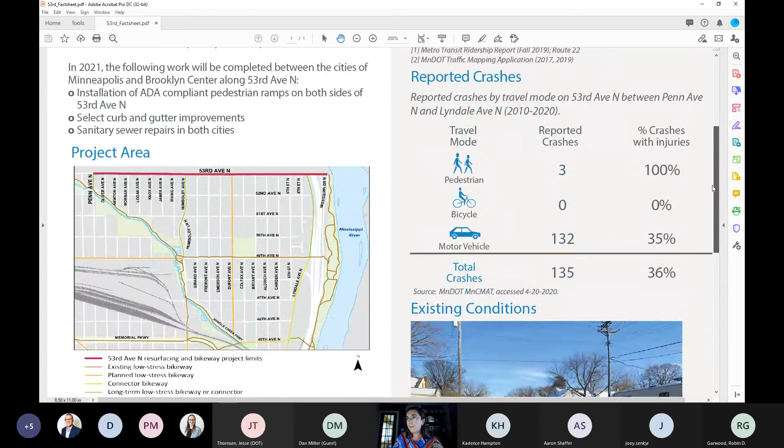We will provide a final design by end of the year so Brooklyn Center can get that submitted to MnDOT due to the type of funding they're using, and implementation is set for next summer. I think I skipped over this, but if any of you live near 53rd or travel along there, there is some work you may see right now between the two cities: installation of ADA compliant pedestrian ramps on both sides of 53rd, select curb and gutter improvements and sanitary sewer repairs in both cities, as well as some work by CenterPoint.

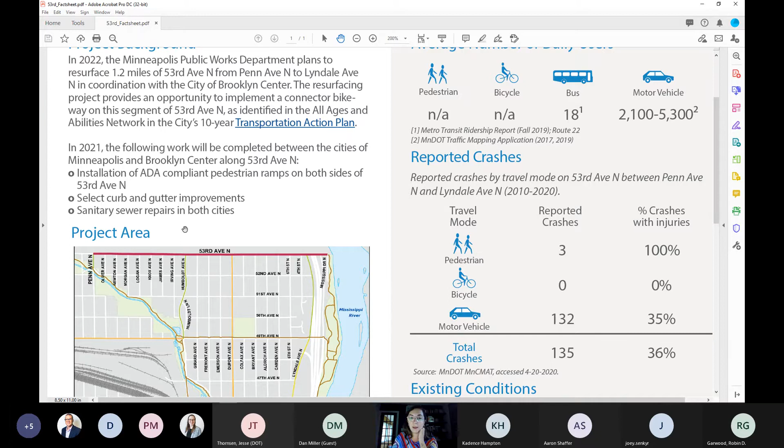So I will stop sharing my screen there, and I will take any questions you have for me. Marty?

Hey, I was in the community meeting. I just want to thank you for your presentations. I love that sheet you have with all the different information on it. Thank you for that, and thank you for doing something on the north side. That's really nice. I have biked that way and I avoid it because of that 94, getting on and off 94 - really dangerous. People run through the stop sign that's nearest the park. Going 94 east or west is very, very scary, and there's a little speeding on that road. So I know you talked about signage being there. Are there any other safety measures that could be implemented? Because it's really dangerous when people are trying to get on those ramps.

Yeah, so you're saying as you get close to the on ramps, off ramps, that's where you see a lot of conflict.

Yes, and the cars, I don't think cars are used to bikers being on that road, because there's not really a lane for us. So just something to think about. It's really hard to cross there, and so I avoid it. I go to 49th instead.